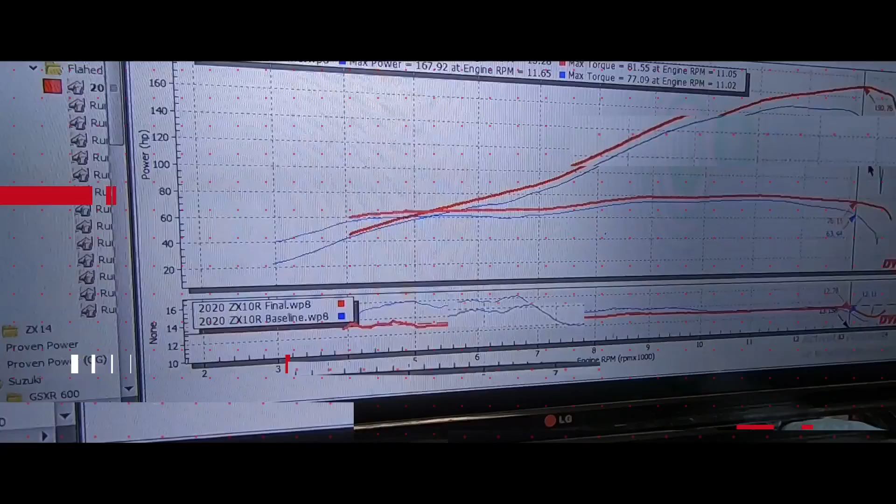Now, we've done quite a few of these videos, and we've touched a lot on these bikes. We do a lot of these bikes. Today, though, we're going to install the full Yoshimura AT2 system.

It's a stainless system, but they have like a titanium coating on it. It's an odd coating. Later in the video we'll show you the exhaust and the finish, but it's really pretty. It's kind of different, different than any of the other coatings I've seen on most of these other bikes that come from the exhaust company, so very interesting.

The other thing we're also going to do is a chain and sprocket kit. We're going to do a 520 conversion on this, and we're not going to change the teeth on the sprocket, we're going to leave that factory. The primary thing we're going to do is just an upgraded chain. It's a QX ring, I believe, the EK3D chain, and it's also going to be a 520, so it's a little bit thinner, smaller, and lighter. So that rotational mass on the bike is going to be lighter.

So in theory, along with these being QX rings, it's less friction. So between lighter and less friction, we pick up a little bit of power to the motor because it doesn't have to try as hard. There's not as much resistance in the drivetrain.

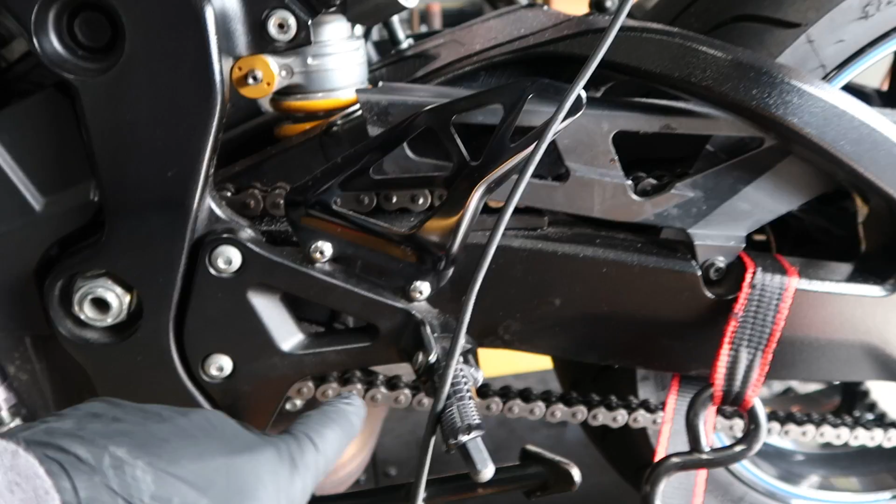So as we're looking at the chain here, this is a 525 from the factory. And as you're looking at it, these have just the standard O-ring, nothing special. In each one of these links, it's a regular O-ring. So you can see these are basically standard O-ring style O-rings.

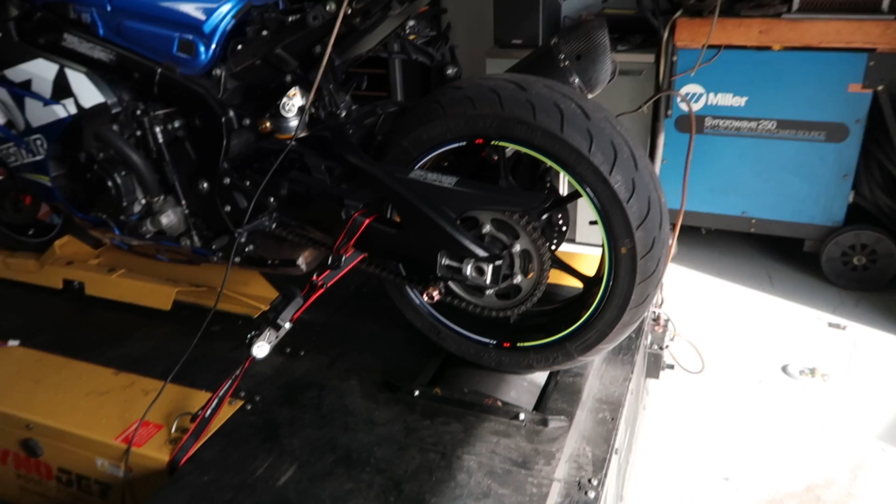What we're going to do is just convert to something a little bit lighter and something a little bit smaller overall.

So currently he's running the Yoshimura Alpha slip-on. Now these came as like a free upgrade around this era, around 2018. They were pushing sales, so they offered the slip-on with the bike. It sounds pretty good, nice and deep, long muffler, a lot of fiberglass, a lot of packing, so it's gonna have a deeper sound to it, but stock header still with the catalytic converter in there.

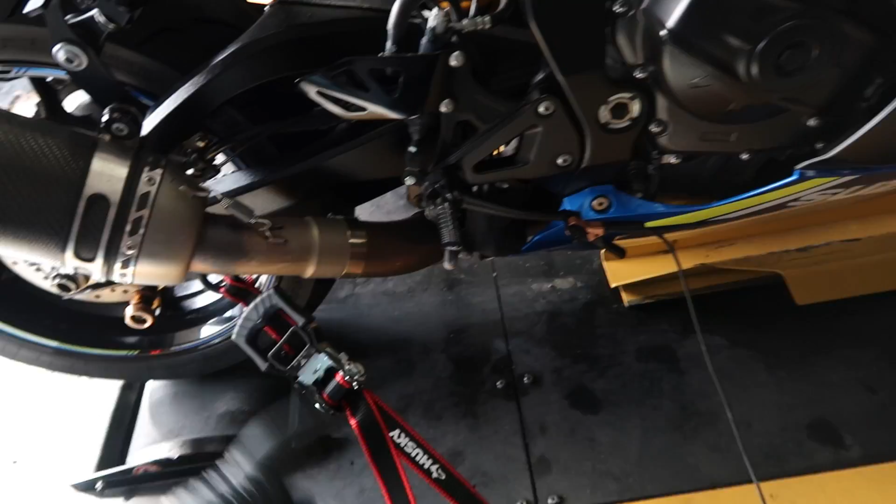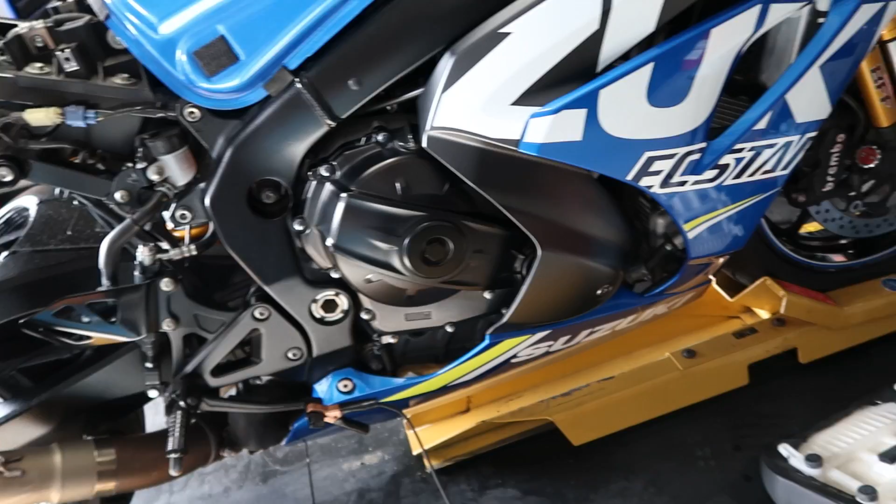So all of this stuff is gonna go, and then we're gonna run the AT2 system, which I love. I think the muffler looks really sharp, I think Yoshimura crushed it. It's a good system, not super expensive compared to some of the other guys, and still produces really good results.

So let's get the bike warmed up and do some runs on it.

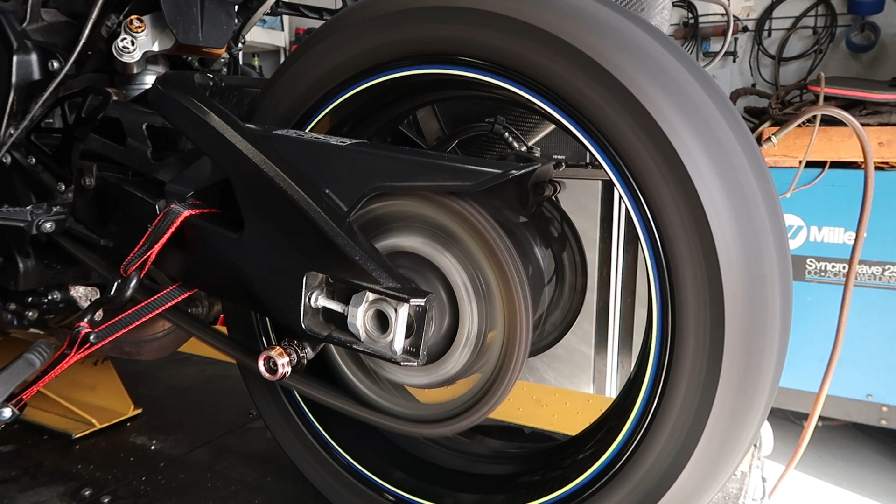So we got the 2018 on the lift, and we just got done doing some dyno runs, and I'm gonna go over there and show you guys the graph. Really interesting, there's definitely something going on with the bike. This customer has been fighting an ongoing problem with the bike, so we're not really sure yet as to what it can be, but I have some ideas.

But regardless, we're going through the process now. The guys have pulled the fairings off here, and they're starting to get the header off and the muffler. We're gonna start working on all that, getting it off. But let's come over here to the dyno so I can show you.

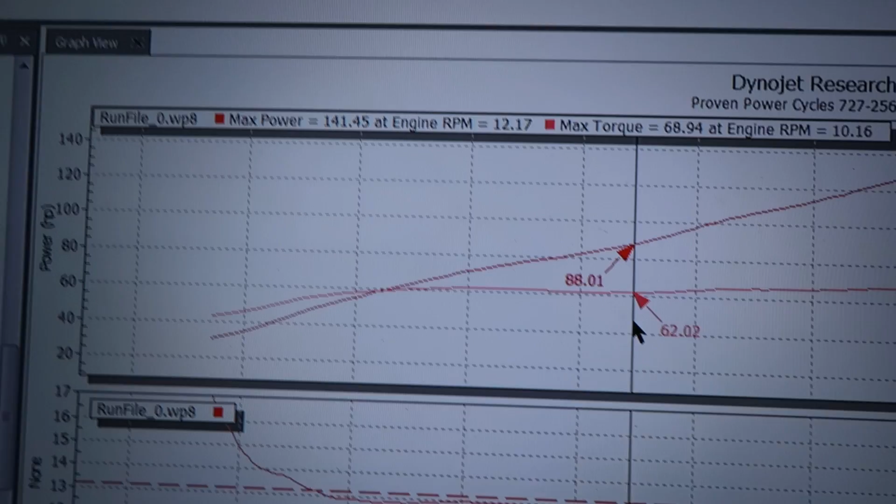What we're talking about, so we only baselined at 141. Now we did a couple of other pulls, and we had identical baselines, literally identical. But I didn't want to keep beating on it because, again, there's definitely something wrong. This is not what we typically see.

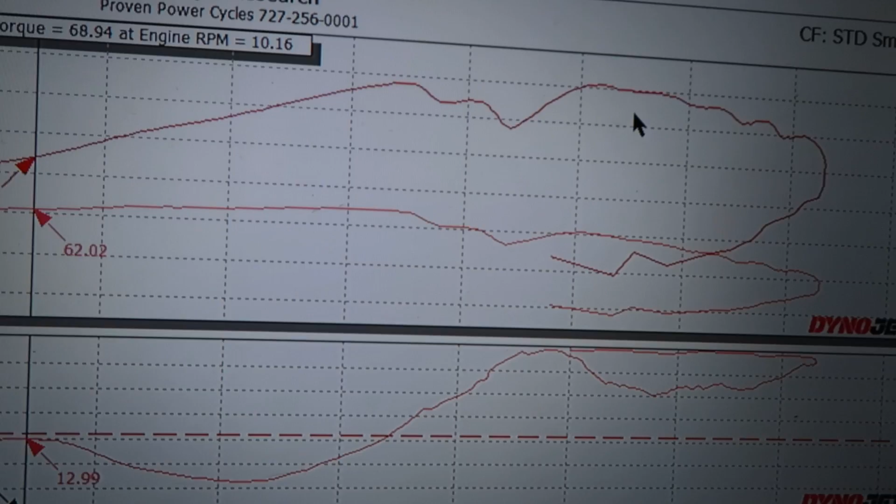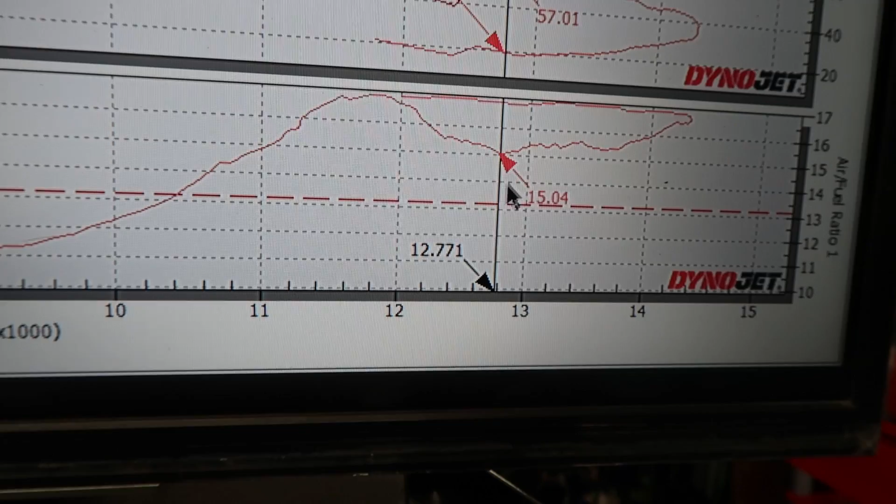And if you look down here, we have a huge rich point right here around 9150-9160 RPM. About 9100 RPM, we're at 11.2. That's stupid rich, it's dumping fuel into the system, and then it goes absolutely insanely lean. Then we kind of come back a little bit here, and then it goes lean again. So it's odd.

So look, the power band looks normal. It looks completely normal all the way up to about here, which is around the 10.5 mark.

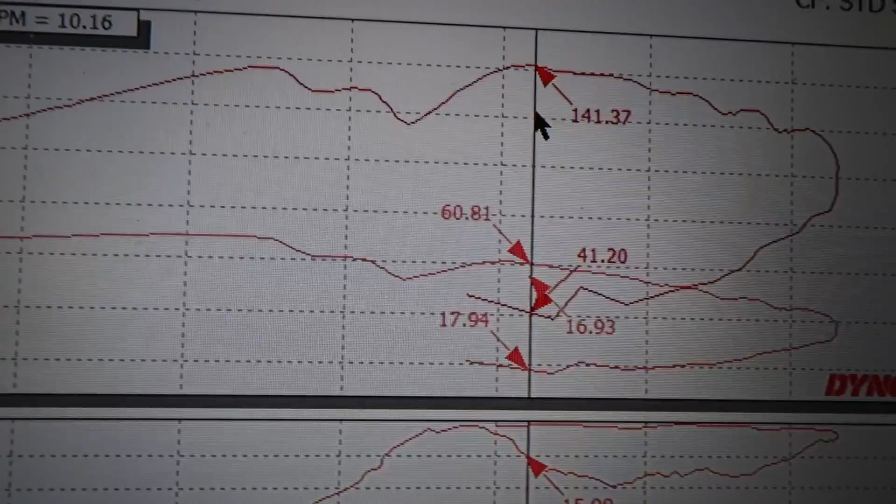This is typically where the throttle blades shut down in the ECU, and they are shutting down in here. If you notice, we have a huge power loss. We go from 136 to 116, so we lose basically 20 wheel horsepower, and then it gains almost immediately, picking back up to 141. So we're back up another 26 wheel. Crazy, 20 wheel drop, 26 wheel gain.

That's gonna make for a crazy ride, and that's what the customer was really complaining about.

So we're not 100% sure what this is. One of my guesses is that it's gonna be the catalytic converter. These are typical, we see these every now and then get clogged up on these bikes. A lot of the new OEM bikes we've been seeing over time, the cats get clogged up or they start to melt and cause a lot of issues, so that's one of my guesses. The other guess, you might have a fueling issue, like a fuel pump problem or an upper injector or something like that - that's another thing we see with most bikes, fueling problems. So that's one of the two things I'm assuming. It also could be something in the ECU, though I don't think it is, because it sounds like the ECU is stock from what the customer is telling us.

So we'll know here in a little bit, once we get this new exhaust on. What we always do is re-baseline the bikes. So if it's a catalytic converter issue and it's clogged up, we will know, because once we put this new exhaust on, there's no cat. So getting rid of the cat, if this curve all of a sudden pulls up and looks basically back to OEM - obviously with a full exhaust now, but a stock ECU - then we'll know it was a clogged cat, right? Makes sense? And if it's a fueling issue, the problem's gonna persist because we didn't touch the fueling system yet. So once we get it on the dyno and flash it and re-baseline it, it'll tell us. We'll give you guys an update here in just a second, and we'll go from there.

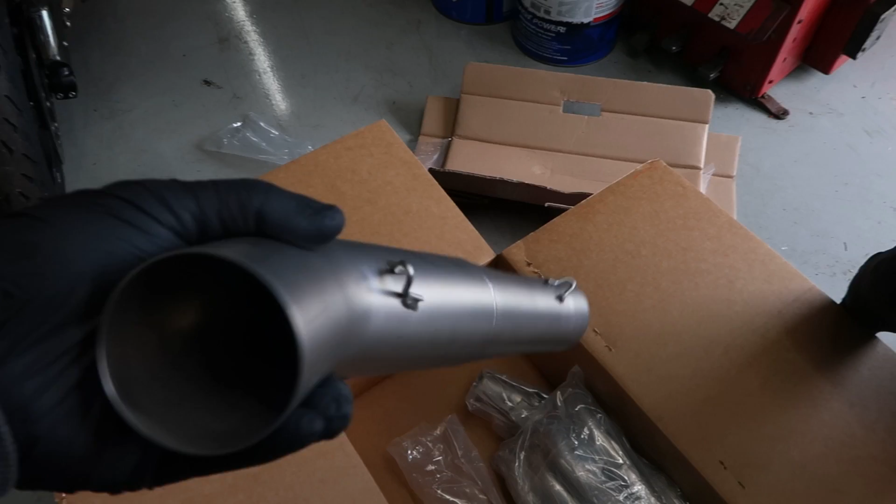Ooh, like Christmas. So this is gonna go up to the muffler, and as you can see, we actually have like an expansion chamber more or less. It's kind of hard to see it in the video, but it's got an expansion chamber. I'm guessing it's like 2 1/4, maybe 2 to 2 1/4 or so, just rough guesses. But I do know a lot of these guys run off of millimeters more than actual inches like we do here in the US.

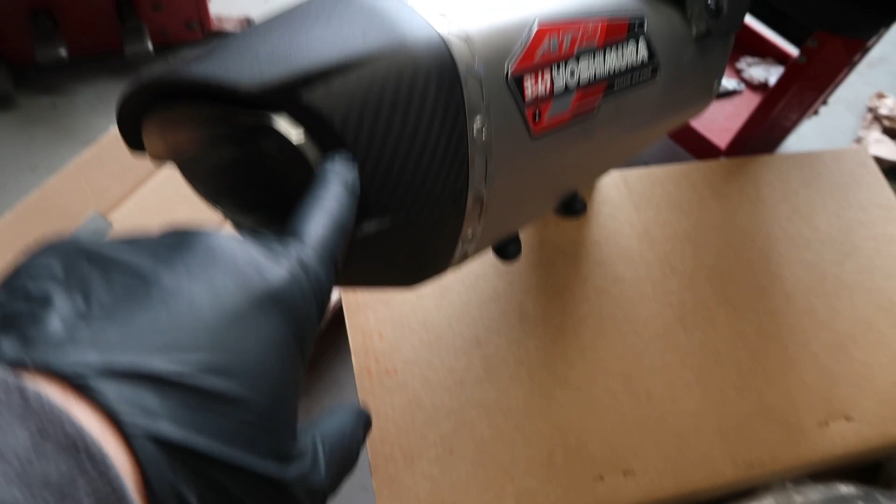So here is the AT2. This pipe, I love this pipe. I love the new cut that they do on these, how it's all the muffler tips and everything - I think it's so sharp. Even the actual metal itself, these are like flat pieces. Look, it's weird, but it forms that circle. I wonder how they do it - it's got to be the machine, yeah, it's got to be a machine that they have it on. But it's pretty cool looking. Anyway, I love the muffler, the muffler looks super cool.

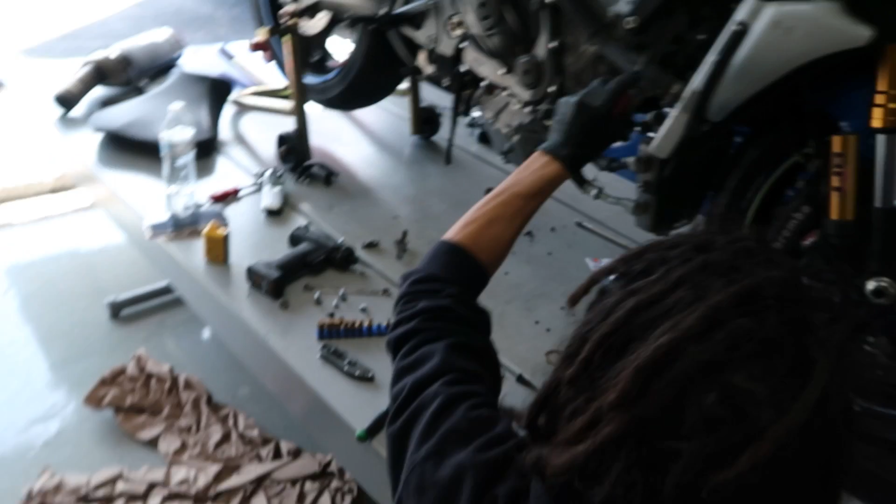Guys, got the stock header and the slip-on, we got all that off. We're working on getting the gaskets out. We're gonna swap the gaskets for the brand new exhaust gaskets.

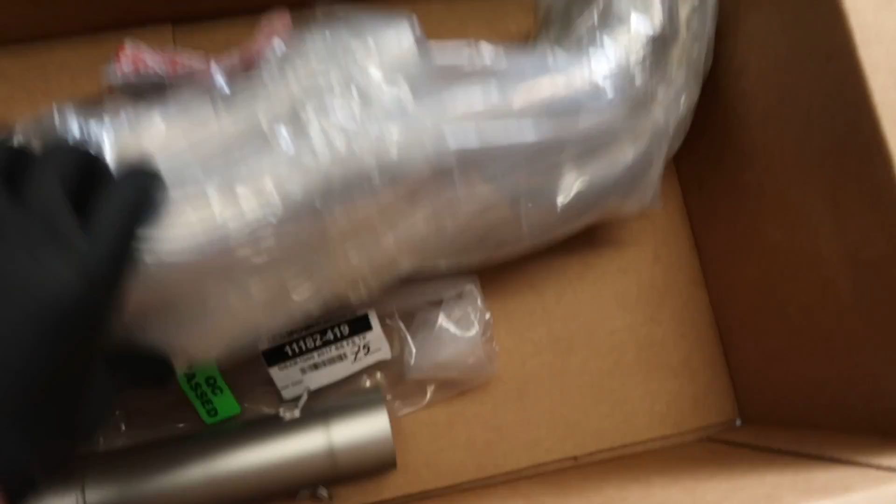Here goes all of our primaries - these are all of our primaries in here, and then this is going to be the collector here. So we have a nice - okay, so this style is a 4 2 to 1. So you have 4 exhaust pipes, and then they go 2 and 2, so as they do 2 and 2, then they collect down here into 1. So it's 4 primaries into 2, here into 1. Typically that's better for a mid-range style power band.

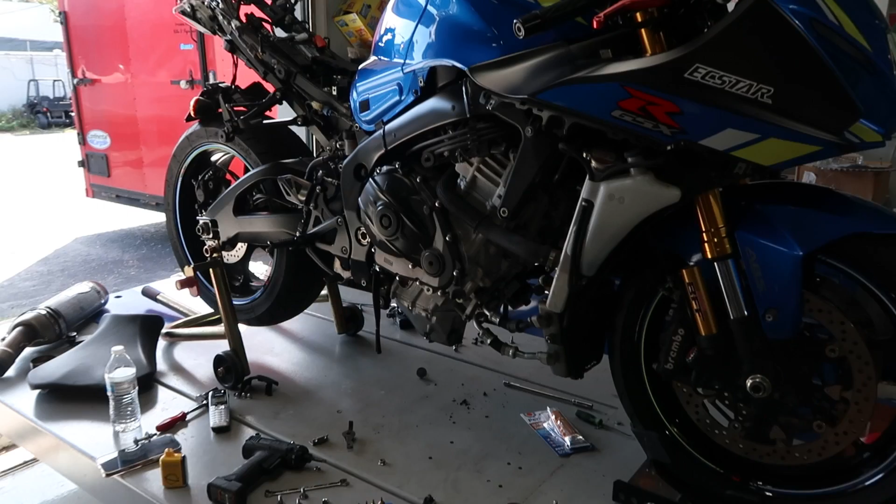When you have a 4-to-1 header, which I believe Brock's is like that, that's usually a better indication of more top-end power. But this particular customer, he's more of a street rider, light-to-light, casual rider. He enjoys fun rides, long rides along the beach, things like that. He would benefit greatly from a 4-2-to-1 style design, so this should work out perfect for him.

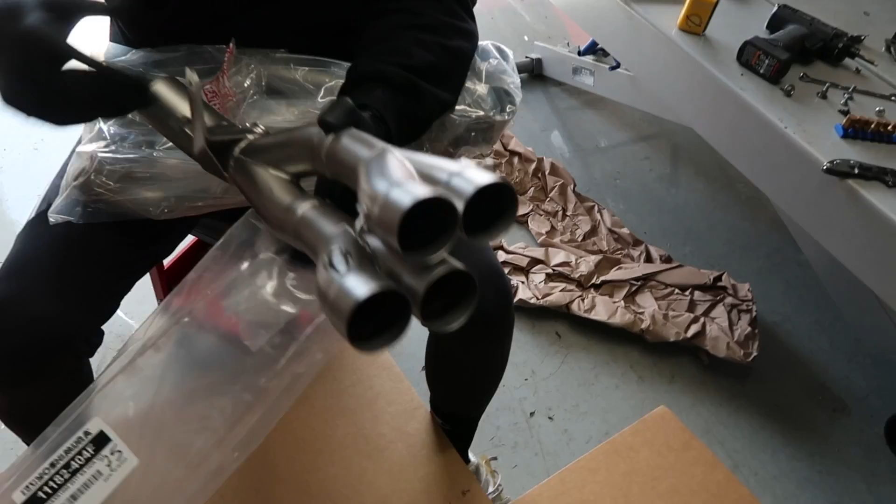It's almost like spray paint, it looks like, but honestly, when we run the bikes, it comes out so clean. This turns like to a nice clean gold color. Pretty cool, honestly. Whatever that coating is, it's pretty cool.

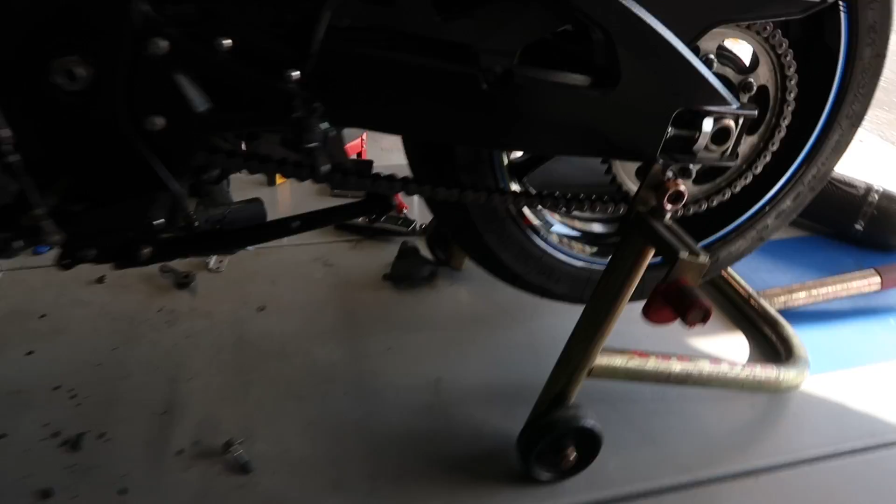It's different. Next update, it'll be on the bike in 2 seconds. Your 2-second time frame is our 30-minute time frame, so appreciate it. Yeah, I saw these guys do a full exhaust in 5 minutes, bro. It was so amazing. Why can't you do it in 5 minutes?

The other thing we're gonna do, we're gonna take this off, start cutting this off, and start working on swapping these chain and sprockets out. So we should have it ready for the dyno in like 5 minutes. We got the full Yoshimura AT2 system, all right? We did the chain and sprocket kit, and now this is an EK3D chain with super light sprockets.

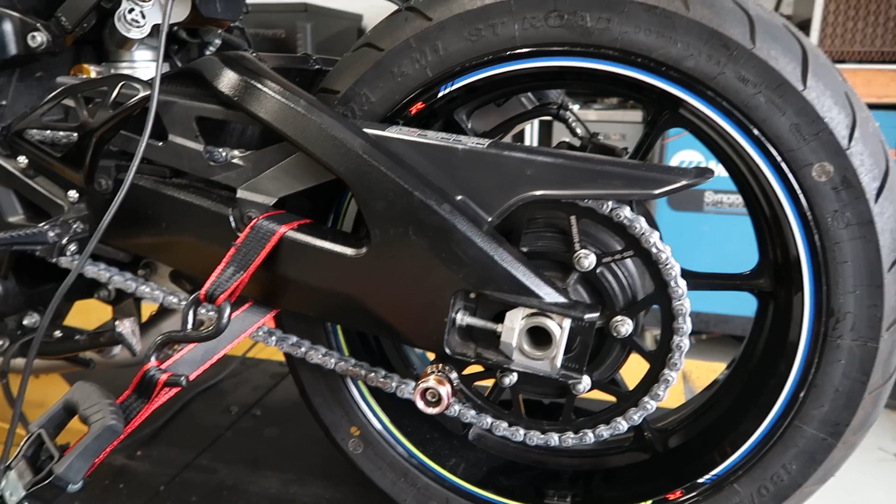Every time you get a brand new chain, they come heavily greased up, and it's really white. So what's gonna happen near the end of this dyno session, it's gonna sling this crap everywhere. So what we always do is go back through and clean off all the excess grease that you don't really need, that they just pack in there with a new chain. We clean off all that excess grease, wipe this all down so it's nice and clean, so you have a brand new clean setup.

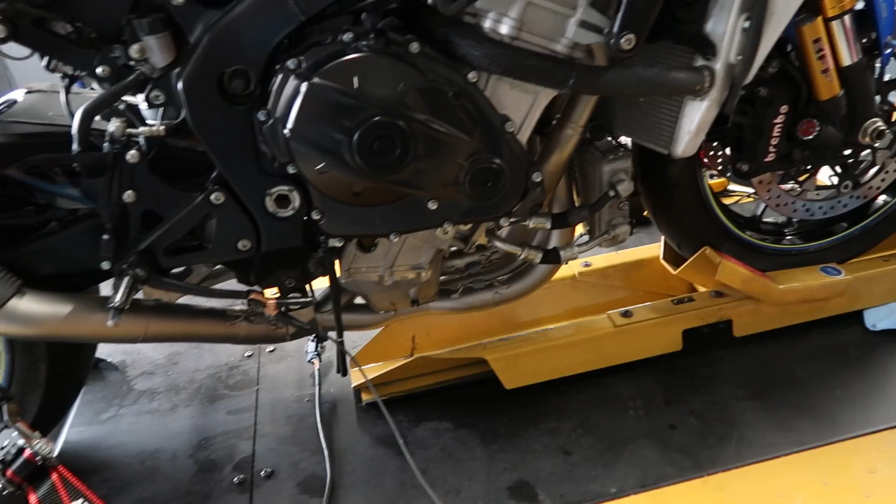The Yoshimura AT2 system, it looks killer. Super excited about it. We like installing these in the M4 systems primarily, those are our favorites, but the exhaust looks really good. We've already started it a couple times, just get a couple little heat soaks in it and check everything. So anyway, let's crank this bad boy up, get it warmed up so we can do some new baseline pulls.

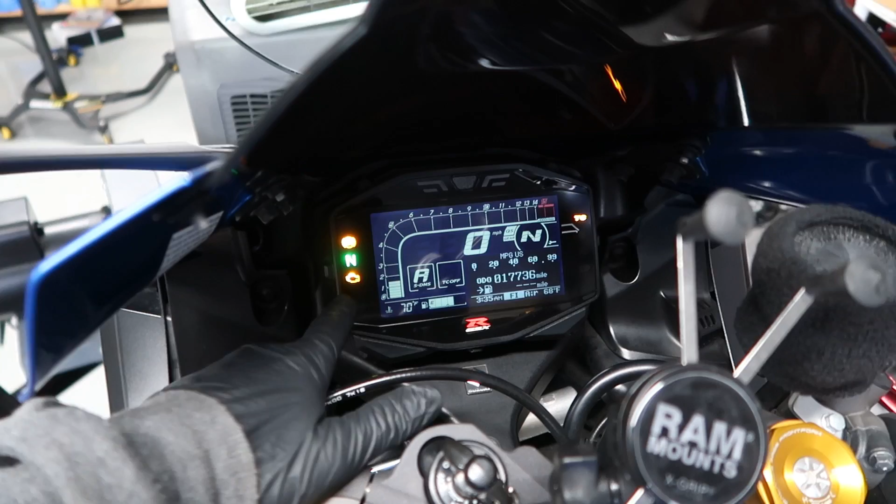Now, you're going to throw a check engine light if you remove your stock O2 sensor and your exhaust servo. This is where the exhaust servo, the mechanism, is located as far as the actual motor for it. It's bolted down into here. It actually comes up, but it's here, the bolt holes right here. I don't know if you guys can see them too well. Yeah, there you go. It bolts in there and basically holds that little motor. So if any of you were wondering what the hell that thing is and why you have zero trunk space, that's the servo motor.

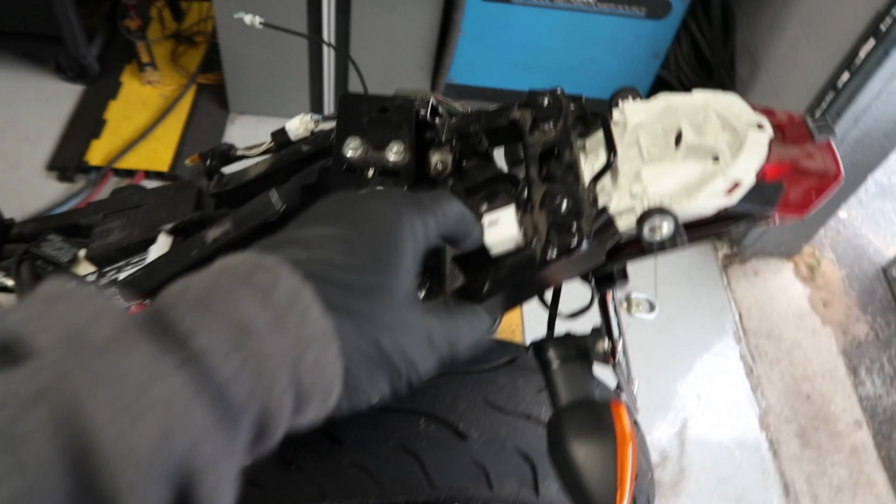So when you pull that out after you do the full exhaust system, you'll have a little bit of room. You can put a little wallet in there, maybe your registration wallet, at least you get something in here versus absolutely nothing with the OEM setup.

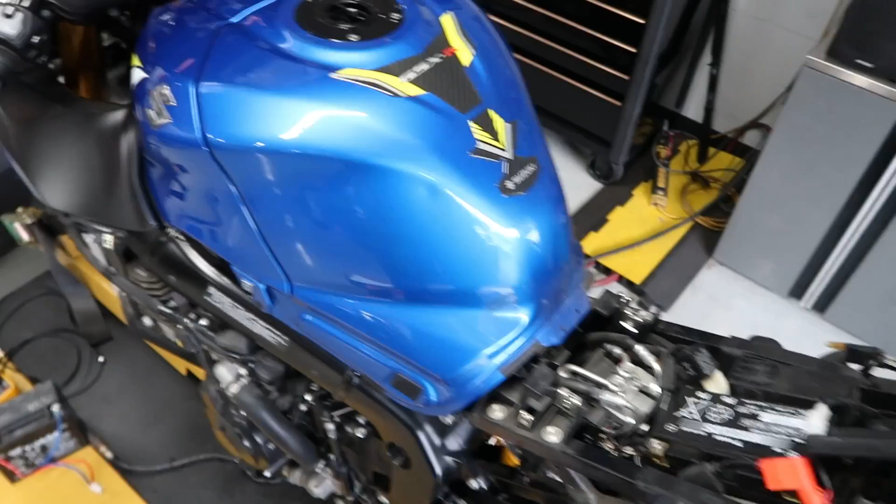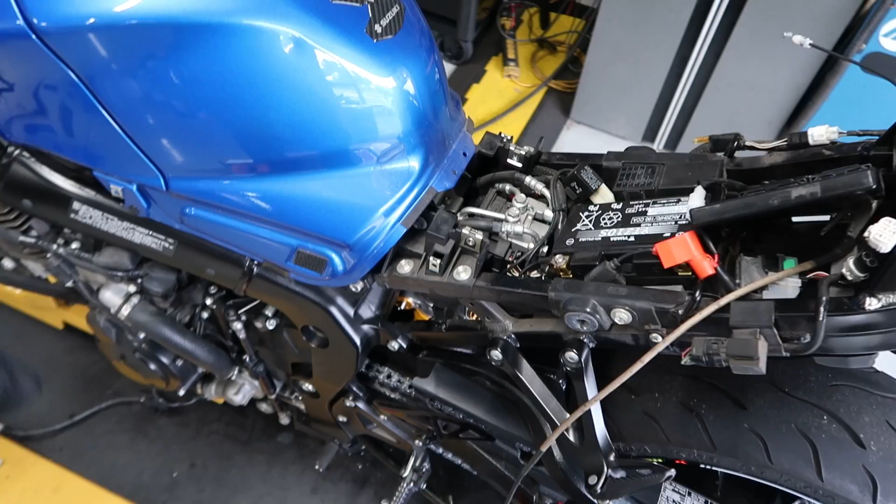We're gonna wipe this all down, clean this all up. This bike's a little dirty, so we're gonna clean this all up for the guy. Like I said, you're gonna have the check engine light from the exhaust servo and the O2 sensor. Those are two things that we delete. When we flash this bike, that check engine light will be gone, there won't be any check engine lights. There's really no downside to flashing the ECU. We hear that a lot, so maybe I'll do a whole video on the pros and cons of flashing and tuning the bikes. But anyways, let's get this thing warmed up and get some new baseline pulls on it.

Alright guys, so we just got done re-baselining this Gixxer 1000, okay? Now, there's something still a little funky about this curve. I wanted to show you guys something, and this is kind of like the analysis. This is like what you get with a tuner, and this doesn't have to be me, but any tuner out there, there's a lot of different variations. Just like there's good doctors and bad doctors, there's good tuners, and there's also, you know, not so good tuners.

So one thing I noticed doing these new baselines: if this customer had a clogged catalytic converter, we would have seen something drastically different than what we are seeing.

This is what I want to show you guys. The blue graph is the stock baseline that just had the Yoshimura slip-on. We were at 141 wheel horsepower, which is very low, and about 69 foot-pounds of torque.

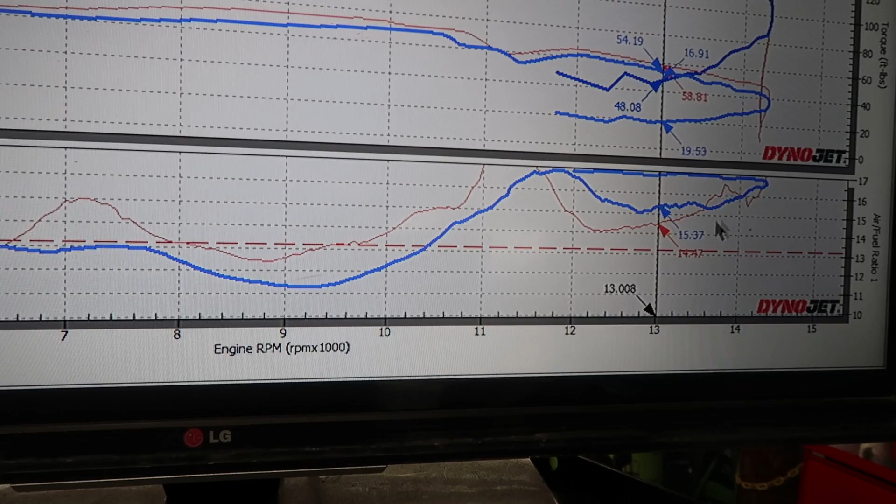Now look at this curve. The air fuel's not too bad all the way up to about 7.5, then it goes super rich, then we go insanely lean, almost off the charts, and it stays lean basically the whole remainder of the upper RPM.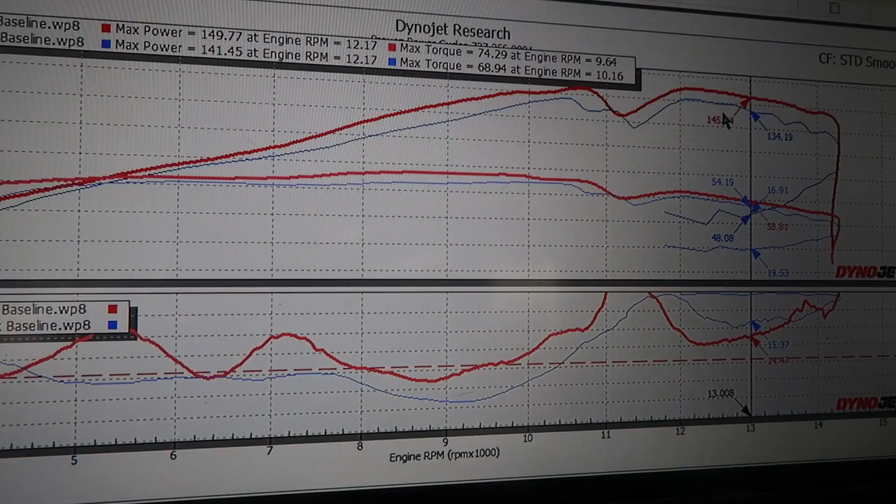Now here it is with the full exhaust installed. Again, this is a new baseline. If it was a clogged catalytic converter, we would have seen this graph go up smooth and topple over, no problem, just like the other ones do, and it should have made around 155 wheel horsepower.

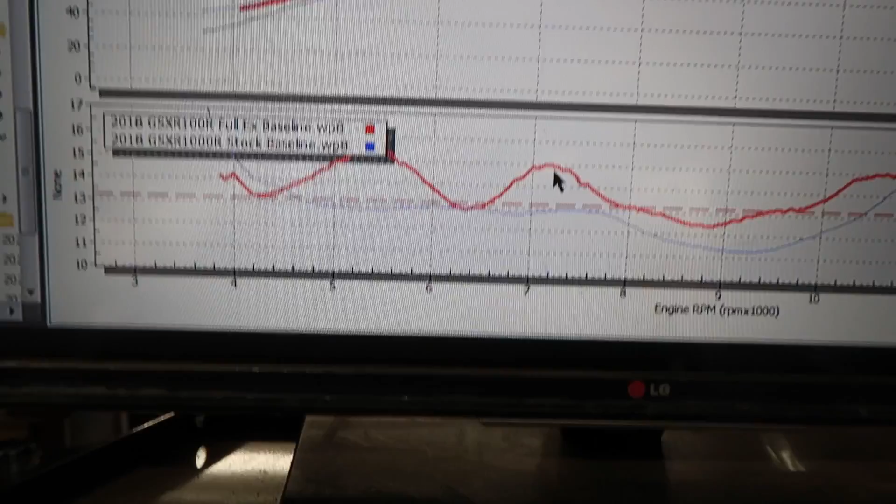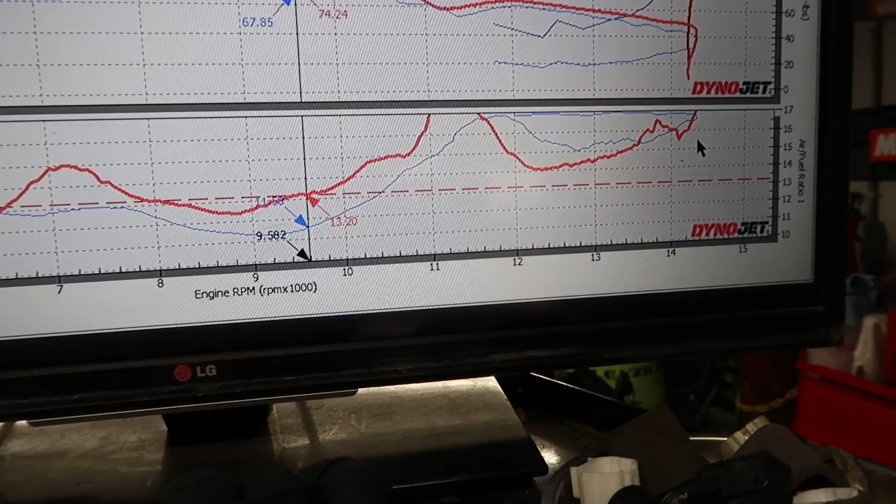But notice, look at our air fuel now. It goes very lean, back to where it needs to be, very lean, back to where it needs to be, and then a little rich here—that's pretty rich actually, 12.4 is pretty rich. Then it comes back, and now look, we're off the chart, comes back lean, still lean, and then it goes back off the chart again. Again, if it was a clogged catalytic converter, this would all be different.

What it looks like now is we're running into a fueling issue—more like a fuel pump problem. So what we're gonna do is set this bike up; we have a fuel pressure tester kit that we kind of made ourselves over the years of doing this. We'll hook that kit up and run the bike more to test it on the dyno to see if we have a fuel pressure problem.

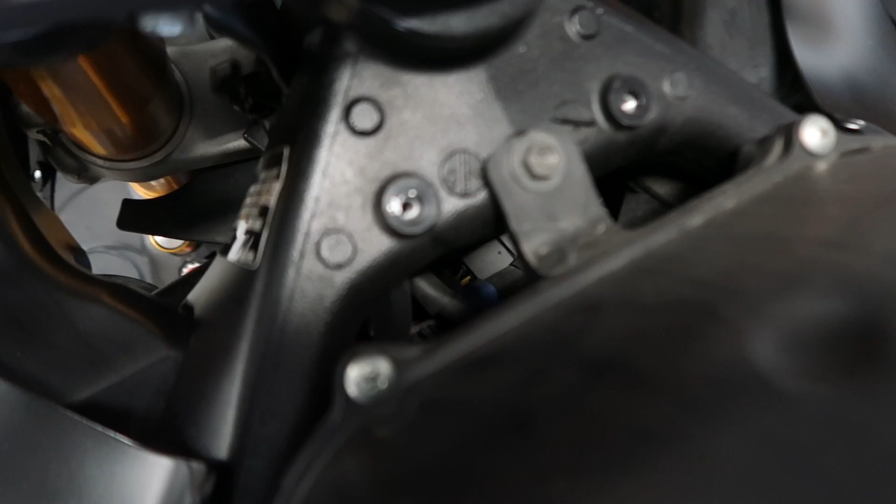If the fuel pump is failing up top, that'll indicate whether we have a clog or a fuel pump failure. Typically when bikes come in with a lot of dust and dirt inside, even underneath the tank—we've already loosened the tank and are looking in there—you can see a ton of dirt, basically sand and dirt molecules, even down on the connectors. So wherever he lives or rides, it's pretty dirty, the air is pretty dirty that he's driving through.

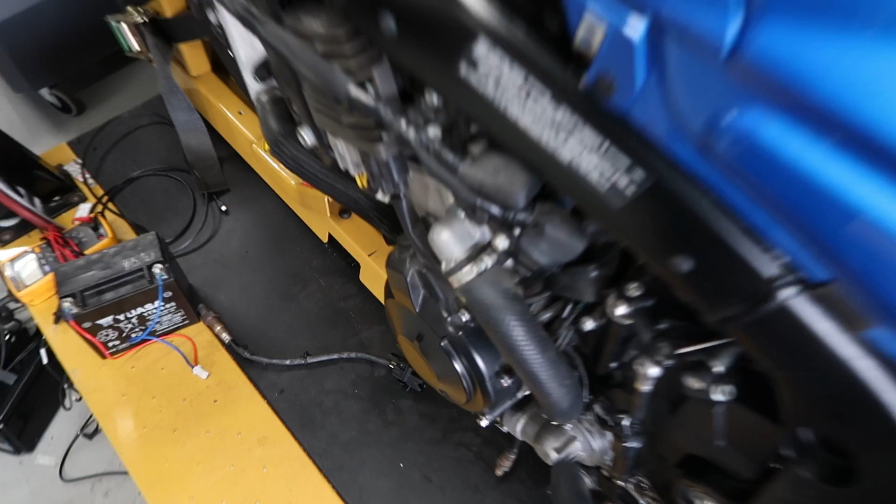I see a lot of these things—dirt gets into our system, into the air system, into our oil, into the motor, it gets everywhere. I usually see fuel pump problems with bikes that have a lot of dirt on them, just like here, where you can clearly see there's dirt, dust, all kinds of stuff on this bike.

So anyway, we are going to dive deeper into this thing. We're going to test the fuel pump out real quick and get that set up, and then we'll go from there.

All right guys, we finally got that GSX-R1000R done, and man did it come out pretty good considering the issues that it had coming in. All right, we're gonna go over the numbers now.

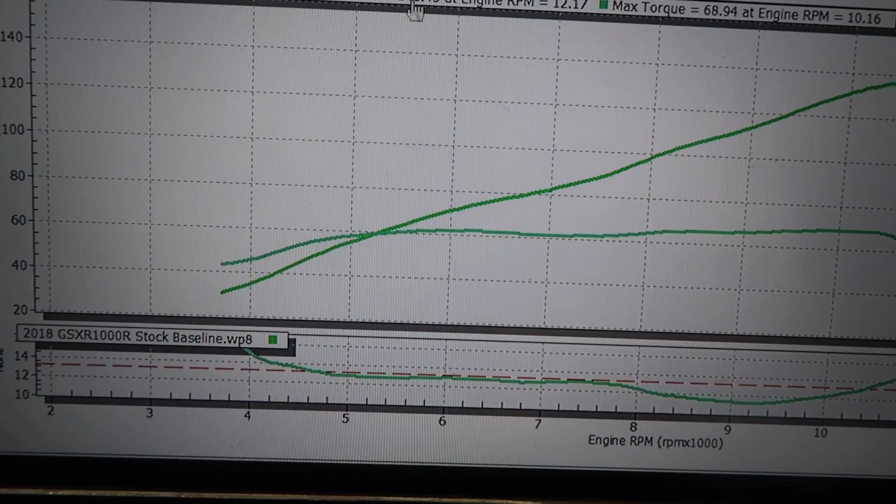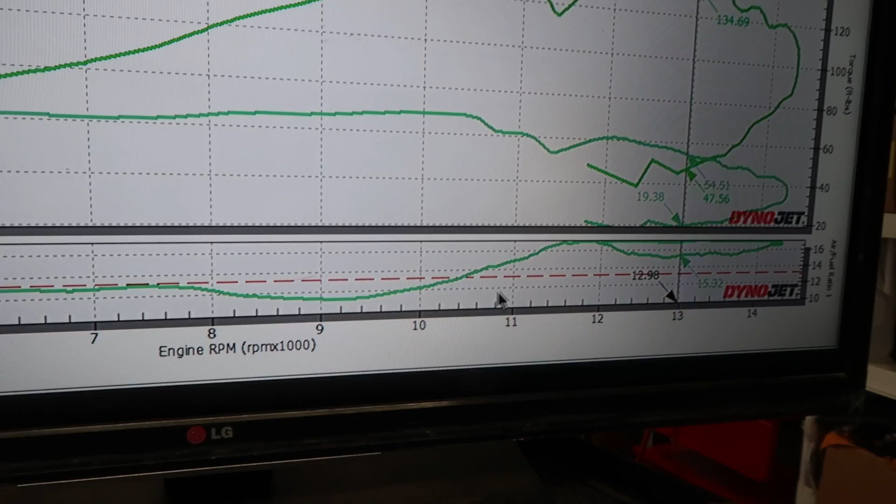When he originally came in, the bike was making 141 wheel horsepower with almost 69 foot-pounds of torque. Now look at this air fuel—we have a nice clean air fuel, then it goes super rich, and then it starts to go insanely lean up top.

And if you look correspondingly, right around here, around the 11,400 mark, look at the power that just drops off. And look what's happening to our air fuel—it's getting insanely lean.

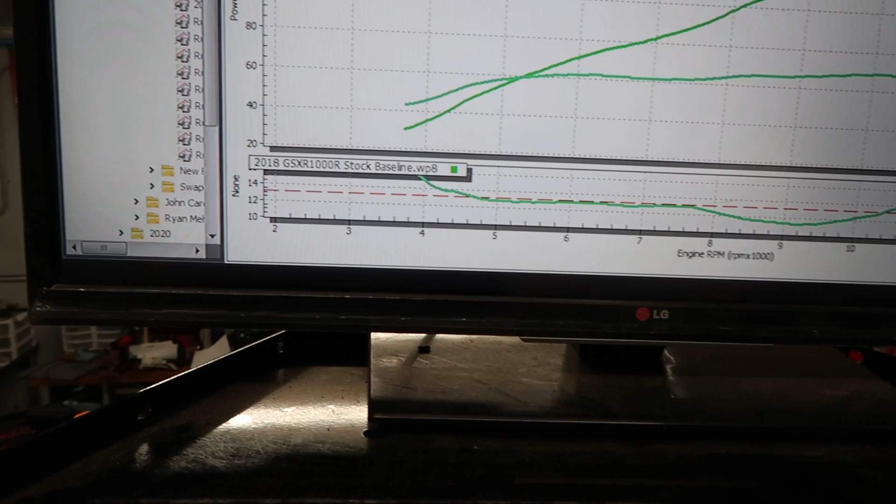We're basically starting to get off the chart. Whenever that happens, you get a massive loss in power, especially the higher the RPM, the more noticeable it's going to be and the worse it's going to react, because it's demanding a lot of fuel. So obviously we get the gist. It's falling on its face. Horrible power band. It's not climbing anymore.

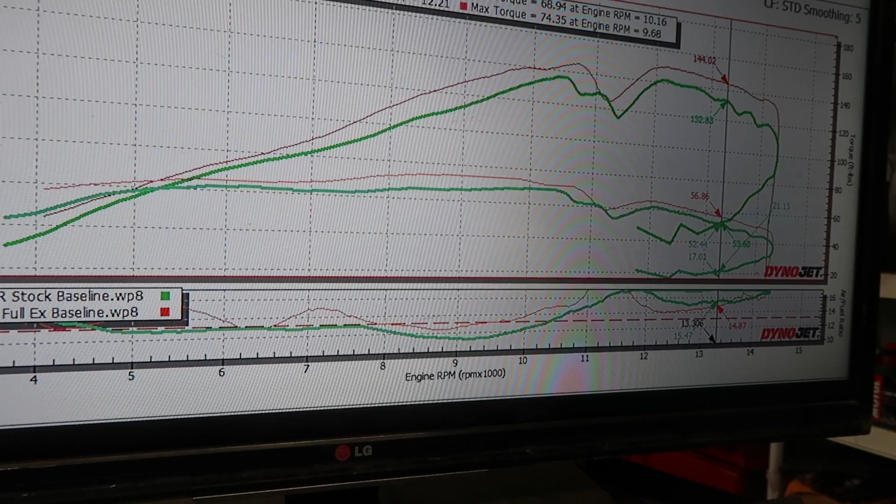It's losing, and that's exactly what the customer was complaining about. Now, in the beginning of the video, we talked about either the hunch was a bad fuel pump or it could even be a clogged cat. We've seen similar issues with a clogged catalytic converter. So after we got on the brand new Yoshi, I said, let's run it again and see if it was a clogged cat.

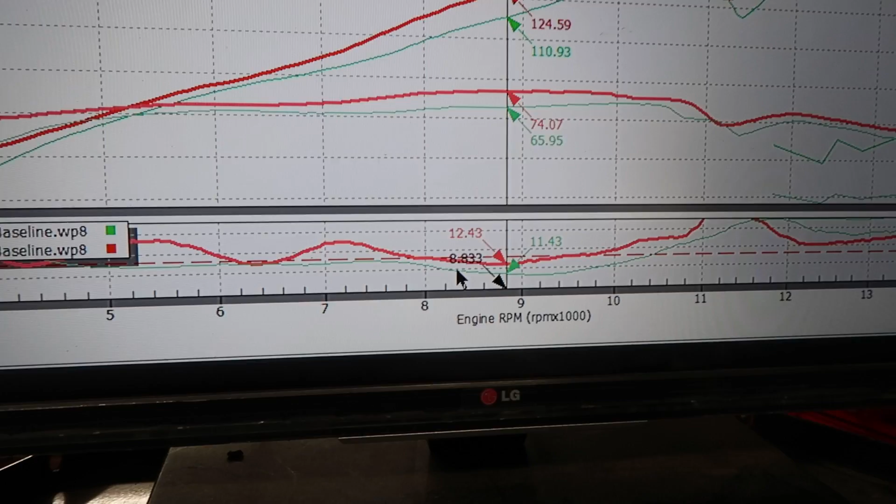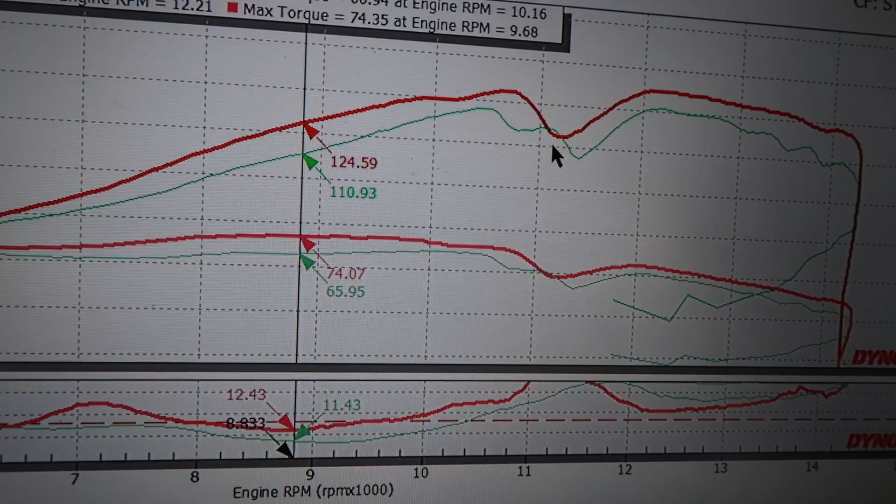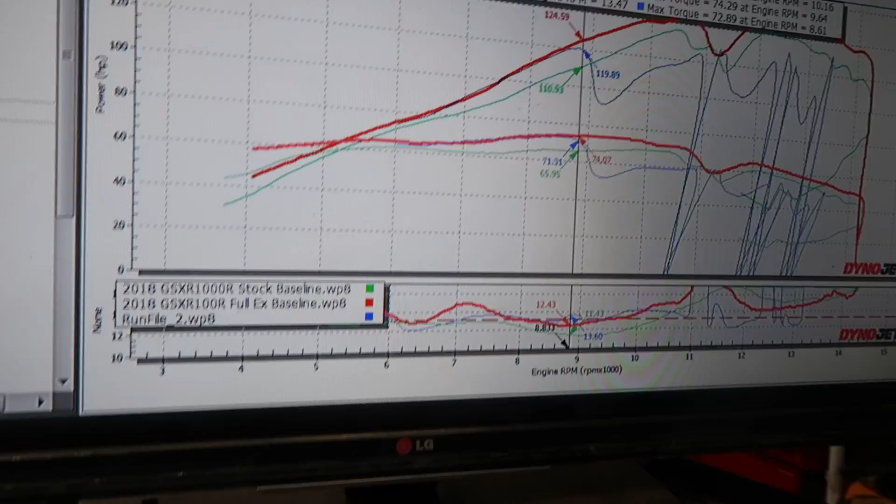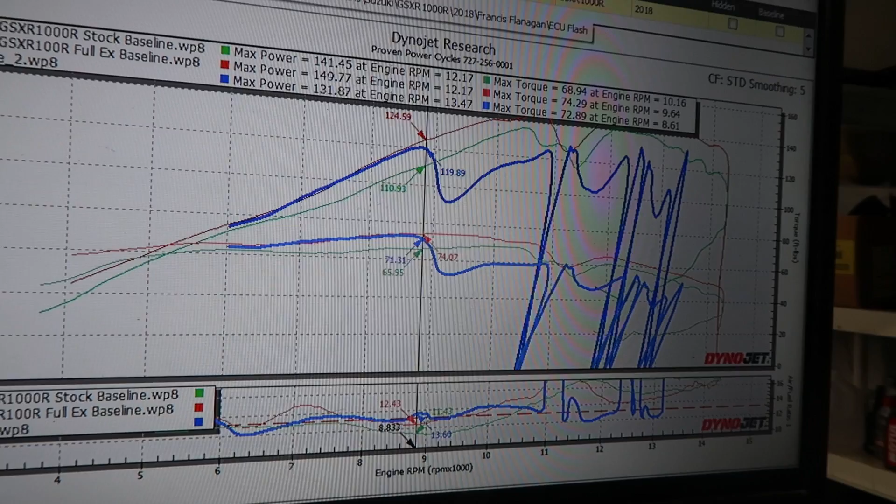So long story short, we attempted to flash it. I said, let me just see what it's gonna do flashed. Well, we put in this map and you see how crazy things got, because it just got so lean. That fuel pump needed so much fuel, it just went haywire. So it was cutting in and out bad, horribly, as you can tell here in that run.

So after that, we tested the fuel pump. We realized that our PSI was dropping off at higher RPM. We ended up getting him a new fuel pump assembly. We tried to clean the pump, but it didn't end up working out. It basically did the exact same, had the same exact mannerisms.

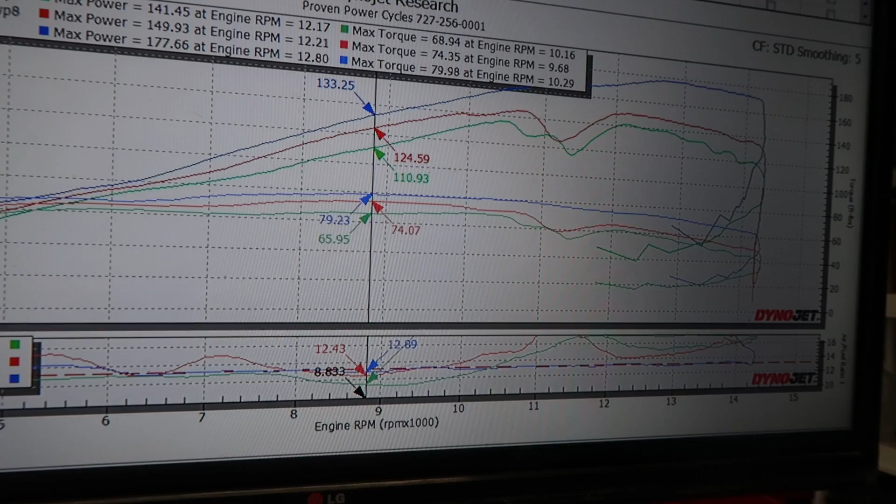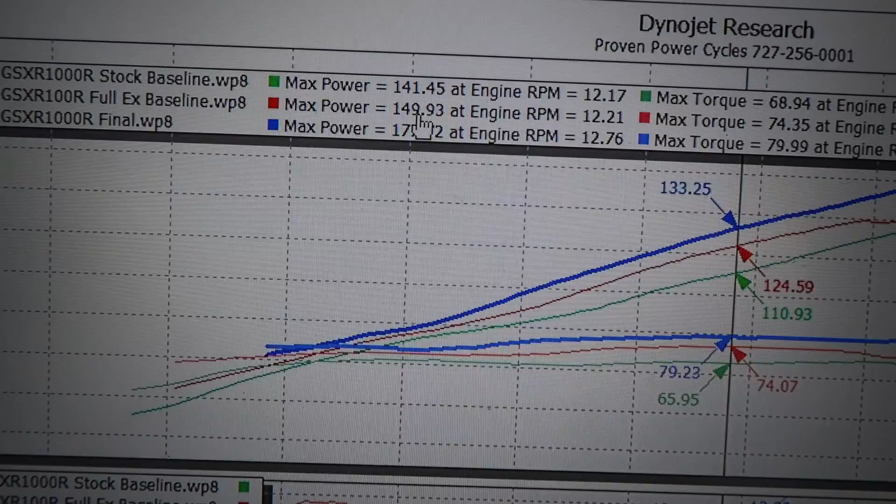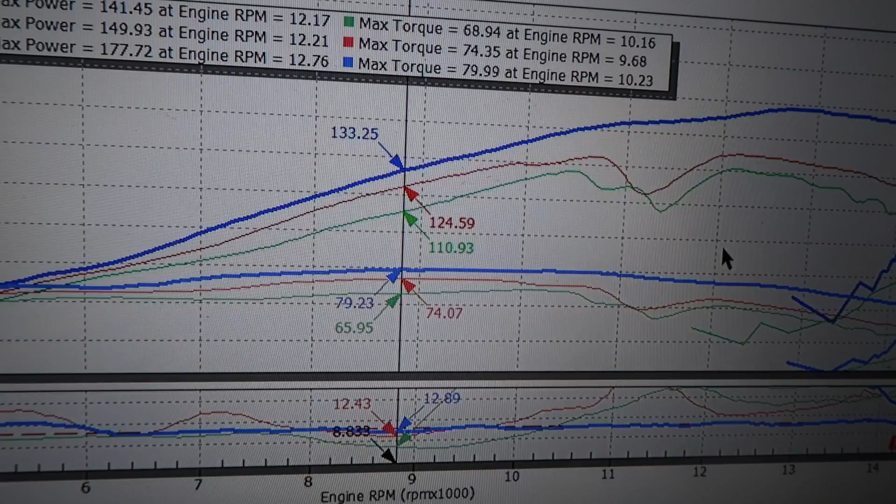So we ended up getting him a new assembly, and here was the final results. It came in making 141, got him to 149, 150 wheel, and then after swapping everything out, we ended up around 177 to 178, and 80 foot-pounds of torque. Not too shabby considering how it was running. And we have a nice clean air fuel ratio.

Now, we could have pushed the bike a little harder and made more power. We definitely could have. However, this gentleman, he's an older gentleman. He's like, look man, I'm not racing the bike, I don't really need gobs and gobs of power, I just want a fun street bike. So that's what we targeted. We didn't really push it with the ignition timing and some of the other odds and ends on the bike. We didn't go for a full race send on this one, okay? So just keep that in mind. We mainly wanted to target his issue that he was having.

He's been to another shop trying to diagnose it. They could not get it diagnosed properly. That's when he ended up coming here, and we ended up going through the full thing. And he wanted the exhaust as well, so it's kind of like a bonus to him. Now, if it was the cat, it would have been an ultra bonus, but it ended up being the fuel pump.

What can you do? The fuel pump assembly, well, you know, what can you do? So we ended up getting it resolved for him, and now he's leaving, he's a happy camper. So I mean, you can't complain with that - that's a 36 wheel horsepower gain, not too shabby. Almost 40 wheel gain from a fuel pump and a flashing tune.

It's pretty impressive. And like we said, he wasn't looking for all the power in the world. He just wanted it nice and smooth and reliable. So that's what we were targeting.